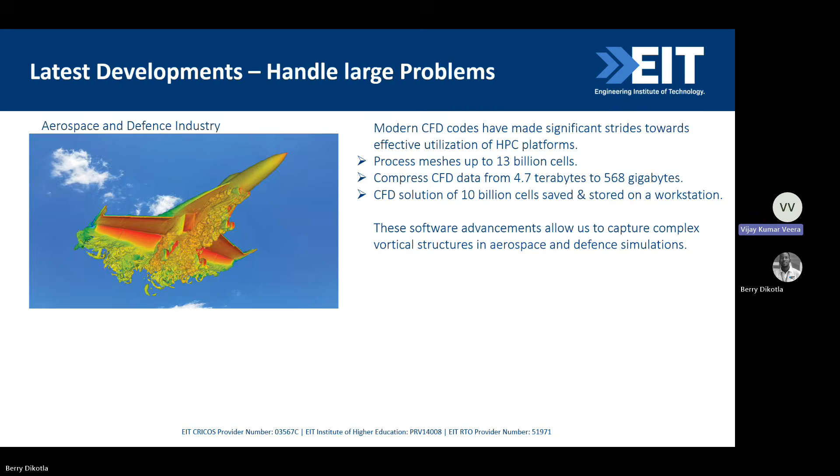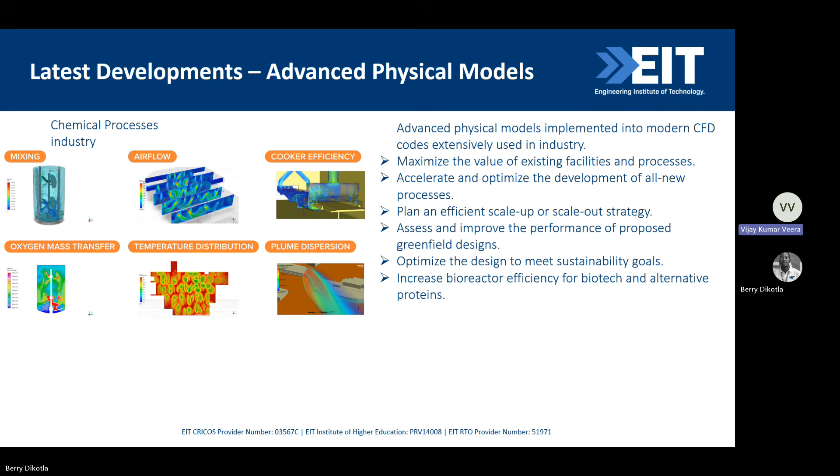So all this happens through the development and inclusion of new models. So a lot of research is being conducted in universities all across the world. A lot of researchers keep coming up with new models to more efficiently predict certain processes. And then a few years later, once these models get peer reviewed and they get accepted by others in the same field, they get incorporated in commercial CFD codes, and industrialists or simulation experts in industry can use these. So this is how year on year the capabilities of the software are improving in tackling a wider variety of problems. So Berry, if you could go to the next slide.

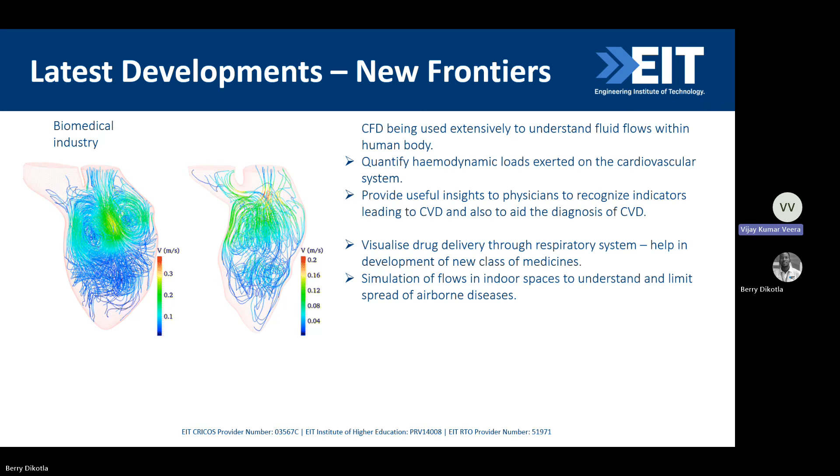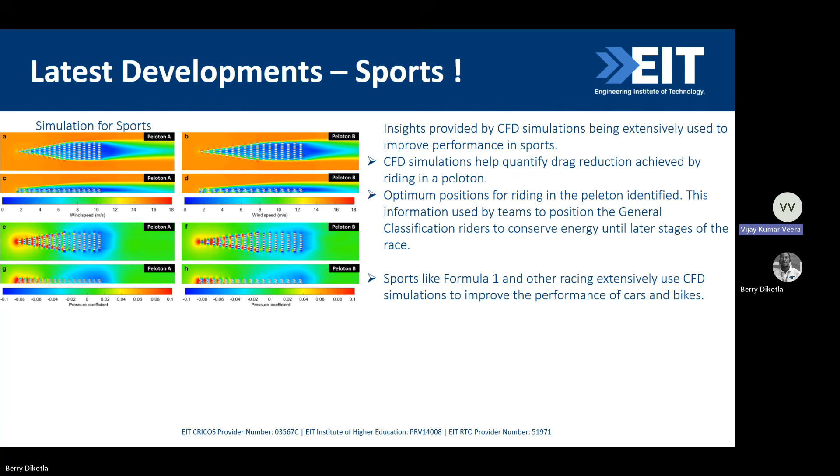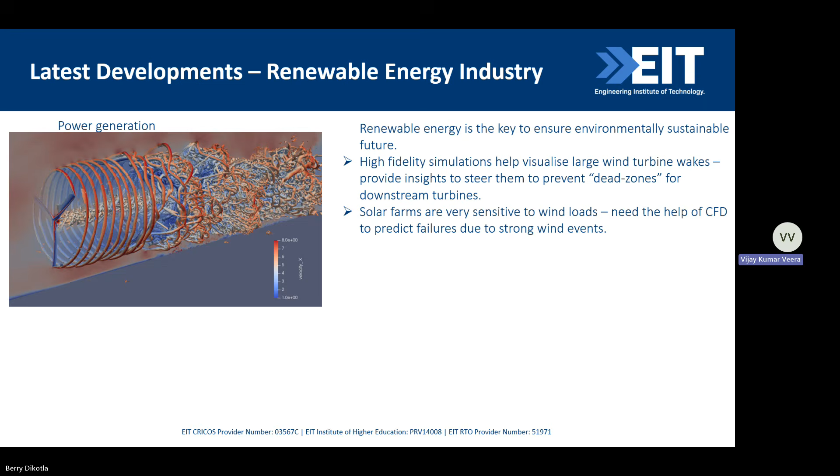Okay. Could you go to the next slide, please, Berry?

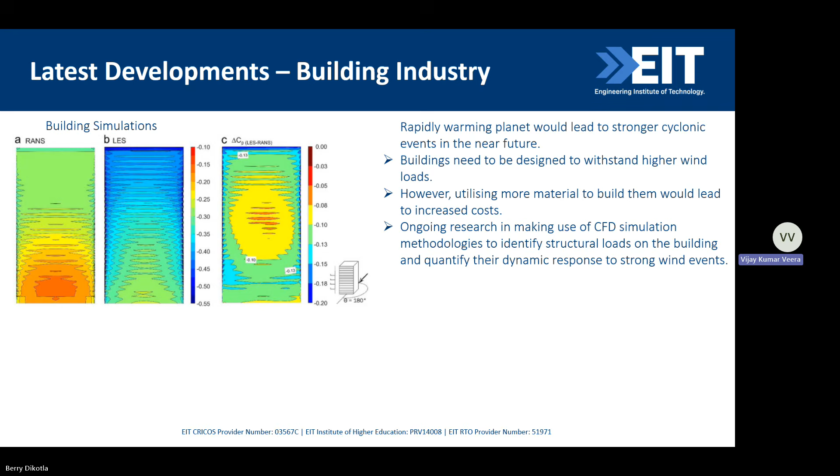Can you all see my mouse? Berry, could you see my mouse or no? No, I can. Let me see. No. Okay, if you can't, I can't. Let me see. Okay.

Okay, maybe I can't. So essentially, I wanted to point to that small black and white picture in the bottom right corner of the picture on the right.

So that's an... Let me see. I'm just checking if I can find. Actually, there's a take control option. I've clicked on take control, Berry. Maybe. Okay. Yeah. It's now showing. Okay.

Okay. Sorry. Go back. Okay, so if you can see my mouse? Yes.

So that one, that's an example of a test building, and what we are looking at is how the loads on this building are changing as the height changes. And what you can do is you can make use of this information to ensure that you have extra padding only where you need it, and you can run this building through a scenario of, so there's what is called a wind code, which will give guidelines on what type of winds a structure should safely withstand.

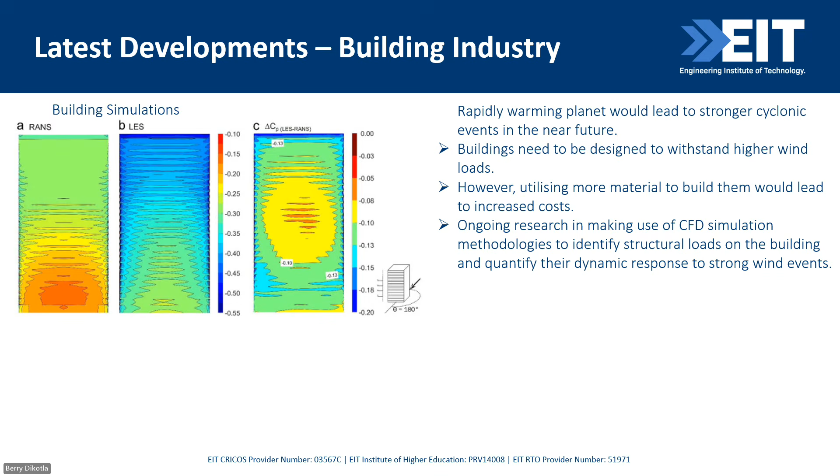So the equations are the same, but capturing these kinds of dynamic responses to strong wind events still needs more computational power, which I will allude to in the next few slides. So the computational power is what's limiting us. The models are there, the equations are there.

But we need to be able to get these things done in a 6 week time frame, not a 6 month time frame, because builders will not wait for 6 months to understand the effects of their design to wind loads. They would want it much faster. They want to build something within a 2-3 year time frame, and if analysis itself takes 6 months, they are just playing catch up all the time.

So CFD simulations are extremely hungry for computational power. Other than deep learning algorithms, I can't find many examples where software codes are so hungry on computational resources. So as the number of transistors we can squeeze on a chip is doubling every 2-3 years, along with higher clock speeds, it means the speed with which we can do computational simulations is roughly doubling every 5 years.

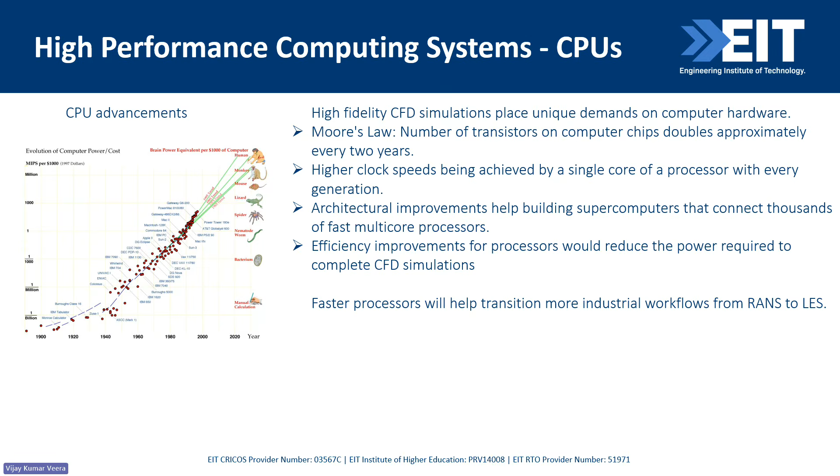Okay, so thankfully we have had another revolution in increasing the computational power available to us. So CPUs, the central processing units, like your Intel and AMD processors, have been eclipsed by graphical processing units or GPUs, developed by companies like NVIDIA and AMD, and they have become the go-to options for compute intensive processes. This is driven largely through data science, machine learning and artificial intelligence algorithms.

But CFD, because it is equally hungry for computational resources, has been able to leverage the GPUs, which are highly specialized in matrix multiplications. So I'm sure quite a few of you have done mathematics where you've gone through matrix multiplications, and CFD codes are essentially a very big matrix multiplication, which is conducted to come up with a flow field that satisfies the governing equations.

GPUs are perfect for these kinds of work. The only thing is you need to rewrite the CFD codes to leverage these GPUs. But if you do that, it can result in 10 times faster simulations. In some cases, they can even go up to 100 times faster.

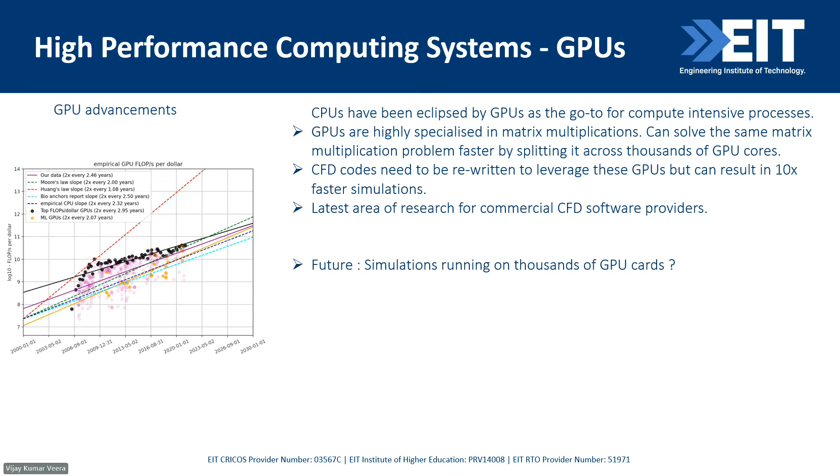I put this slide because I have a personal story to share. I remember sitting in my first job, in a talk given by a senior researcher from that organization, where they tried to do a full-scale CFD simulation through an engine, and they realized that they're not there yet. This was between 2006 and 2008, around 2007. So that's about 18 years ago. But in the space of 18 years, advancements in both software and hardware have allowed researchers to do this kind of a simulation.

And so what you will see here is these high fidelity images are large eddy simulations, which resolve all the large time scales of the flow. These are all the large vortices that get generated when the flow goes through a gas turbine engine, and these are all simulations that change with time, and they require millions of cells, and they generate terabytes of data which you need to store and analyze properly to actually get the information that is going to help the product to improve.

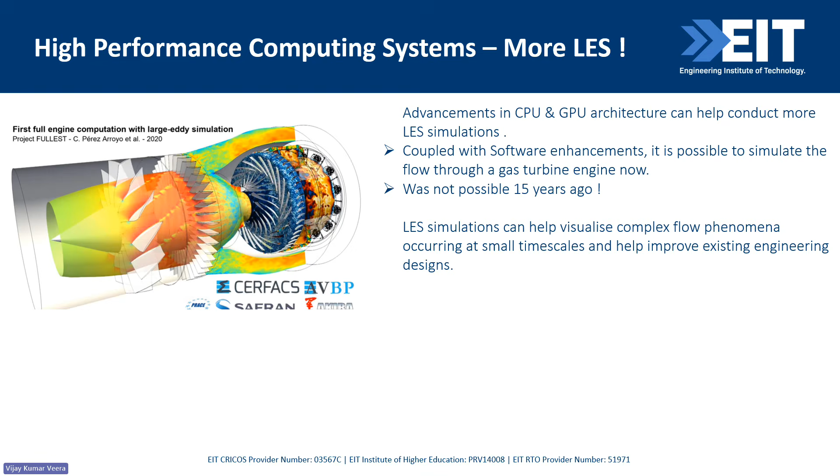So that's the first two sections, where I first talked about software improvement in handling more complex geometry and more complex physics. Then we talked about how the computers themselves, the CPUs and GPUs, have improved to allow more complex simulations. Now, the third section is a new frontier that has opened up in the last 4 or 5 years. Artificial intelligence has gotten embedded deeply within our day-to-day lives, and all of this is through various deep learning algorithms that have been developed all over the world.

If you get to the core of it, the computations required to run these deep learning algorithms are very similar to the computations required to run CFD solvers. So researchers who are working in the CFD field have recognized this and tried to come up with novel ways of utilizing this new field of artificial intelligence to augment the CFD data that is being generated.

Okay, so AI algorithms require a lot of data. For example, if you want to develop a self-driving car, you need to give it hours or months of footage, which helps it identify various obstacles that can be encountered when a car is driving on a busy road, and then it will be able to understand and come up with ways of reacting to those obstacles.

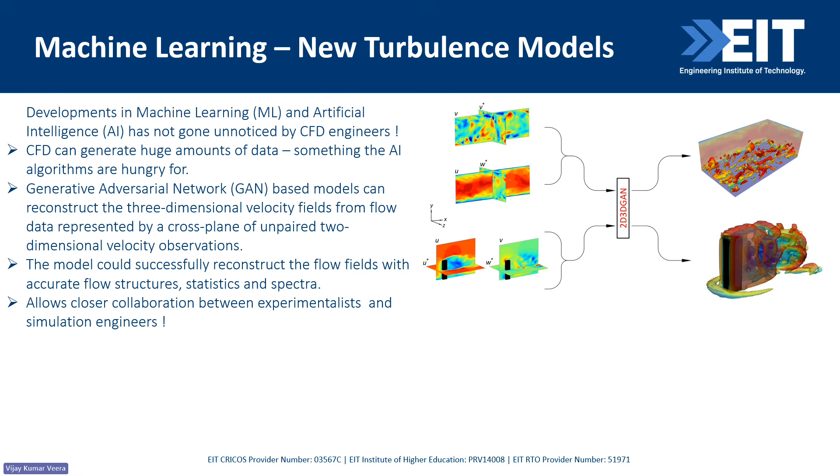So it'll allow closer collaboration between experimentalists and simulation engineers. This is one way machine learning is being used. This is another very interesting area of research for lecturers and professors in universities all across the world.

Previously I showed you a picture where I asked it to create an image representing the latest developments in CFD. That was a text input, and it created an image based on the text input. That was an example of a neural network. It's the same if you use something like ChatGPT.

You ask it a question, you give it text, you say 'write me a letter to get me admitted into EIT,' and you can give it your resume. It will go through the resume - this is all text input - and come up with a letter highlighting your past experience, and provide scenarios to showcase how you will use that experience to be successful in EIT. That's an example of a neural network.

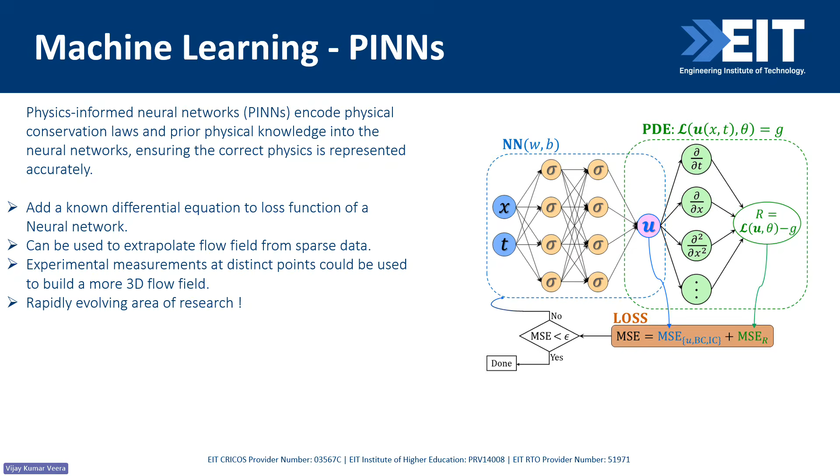So what it does is it maps input data to output where the relationship is very complex or unknown, and then it will find patterns between the connections between the inputs and the outputs. With these patterns it's going to be able to predict aerodynamic quantities of interest, such as pressure distribution, lift, and drag, based on velocity information.

An example is when you're doing experiments, you either capture the velocity information or pressure information at a given point. Suppose in your experimental data you measured velocities but don't have pressures. If you have these kinds of surrogate models, you can feed in this velocity information and come up with a pressure field that satisfies the governing equations, giving you a physically valid pressure field without needing to rerun the experiment or do a CFD analysis. These surrogate models can be very useful for experimentalists and researchers.

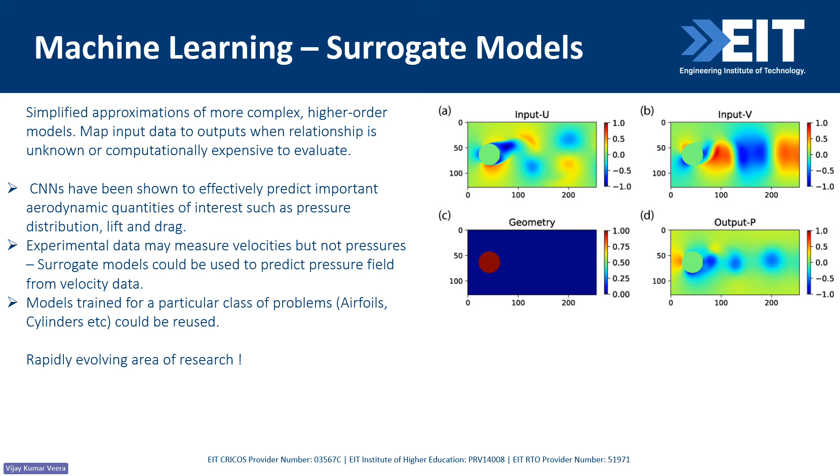This brings me to an end of the webinar, where I've briefly discussed the latest developments in the field of computational fluid dynamics. We've seen how CFD software is improving its capabilities and trying to keep pace with high performance computing systems for analyzing complex systems. We've also looked at various exciting avenues of research opened up by the development of machine learning and artificial intelligence algorithms. So that brings me to the end of this session.